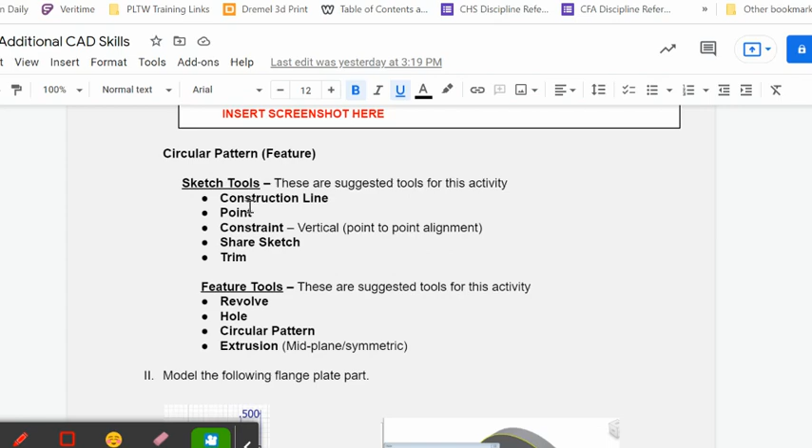Hello everyone, I'm going to show you all how to use the circular pattern in Fusion 360 and make this part. As usual, we can see where our sketch tools that you're going to need to use are: points, construction lines, constraints. We might need to do some trimming. Then there's our feature tools as well.

First thing we're going to do is model the following part. It's over here. Ultimately, this is what you're making. This is much like the rubber handle that you just did. So let's get started. A couple things to note. I'm going to do this construction line across the origin. It might make our life a little bit easier.

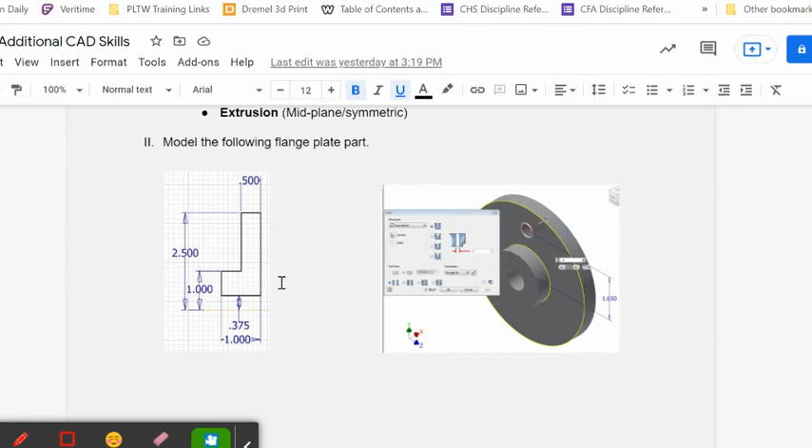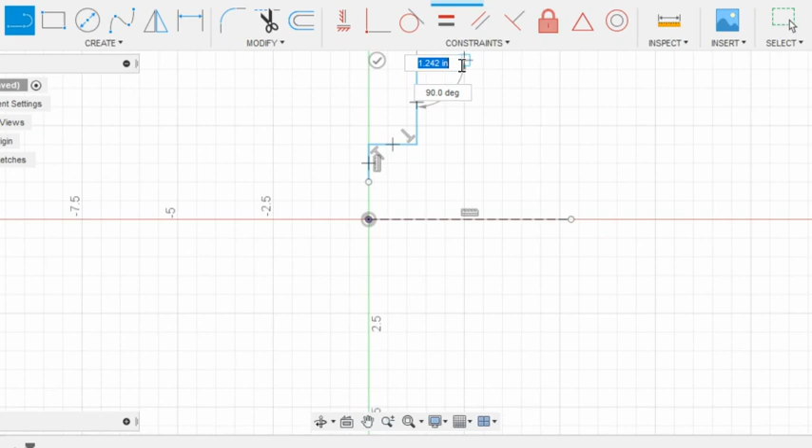So as before, I am actually going to start with my construction line on the origin. But I'm just going to put it over here. And then I'm going to create the rest of this part in just a rough drawing size. I forgot to turn the construction line off. Okay. So we're going to just model the rest of this part. There. So we don't have any accurate dimensions yet, but that's what we're going to fix.

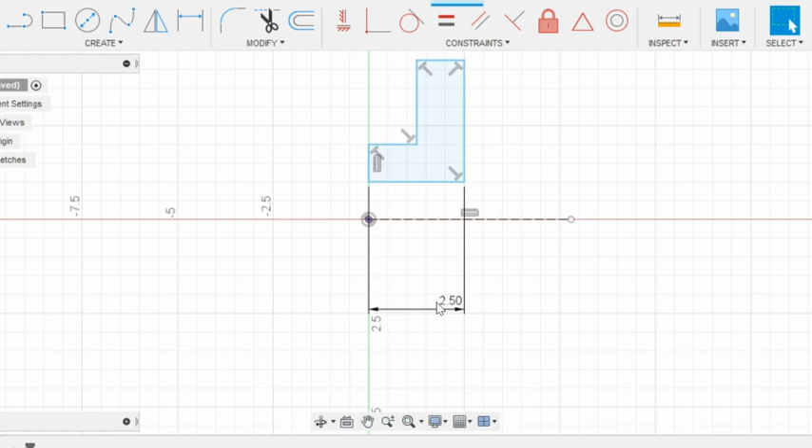So we can see, if I zoom in, it's 1 inch wide, 2.5 inches from bottom to top here. So let's start with those. So we know that from here to here is 1 inch. Ooh, looks like I made mine a little big. Let's change that dimension. Let's fix some things here. I should have done that in the first place.

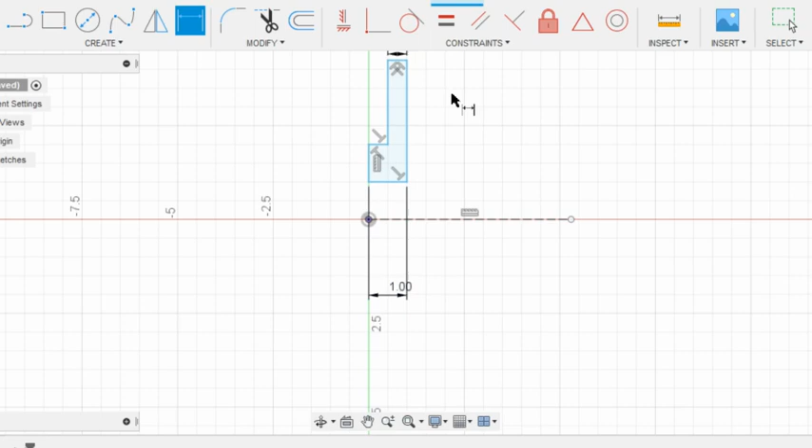So I know that this, let's start with this one. We know that this is 0.5 inches. And we know from here to here is 1 inch. So that fixed that for us. I know that from the construction line to the top of this is 1 inch, and from the construction line to the top of here is 2.5. So I know from here to here is 1 inch. I know from here to here is actually 0.375. I'm going to go ahead and fix that.

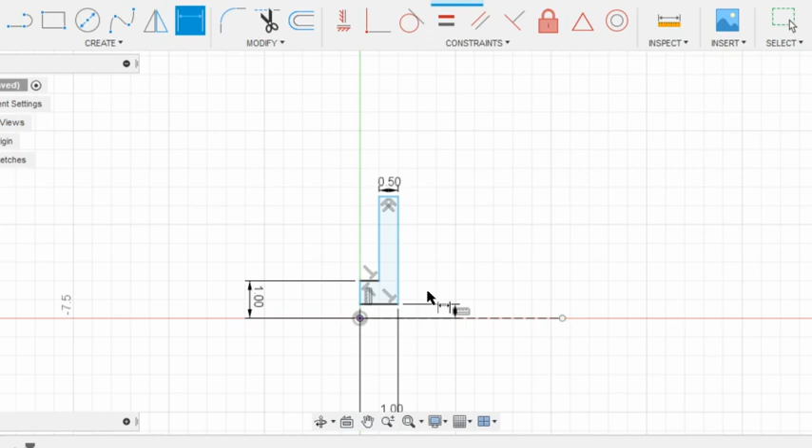And from here to here is 2.5. Okay, so I made my initial drawing a little larger than it should have been, but we use the dimensions to fix it. 0.375, so let's check 0.375 from there to there. All right, looks like we're good.

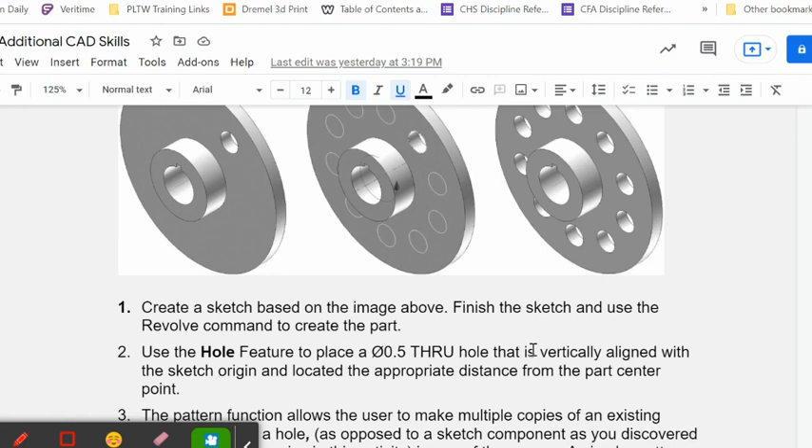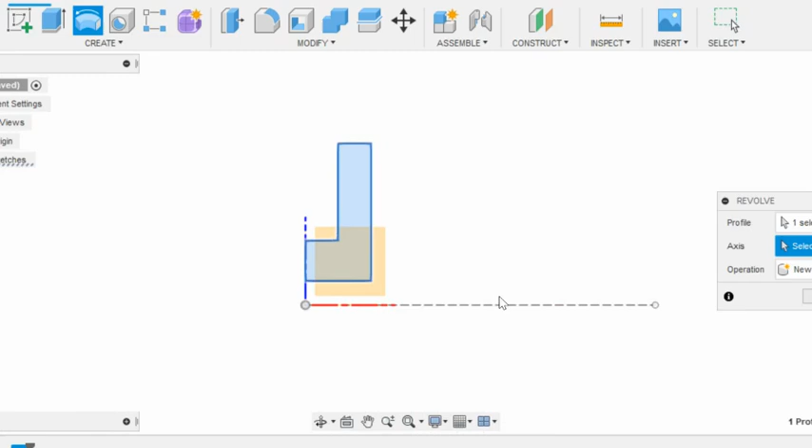We're going to revolve the sketch to create our part, and then we're going to use the hole feature to place a 0.5 inch through hole vertically aligned with the sketch origin. So first thing we want to do is, we don't want to create a sketch. That was my fault. We're going to revolve this part along this axis. Now we're going to say okay.

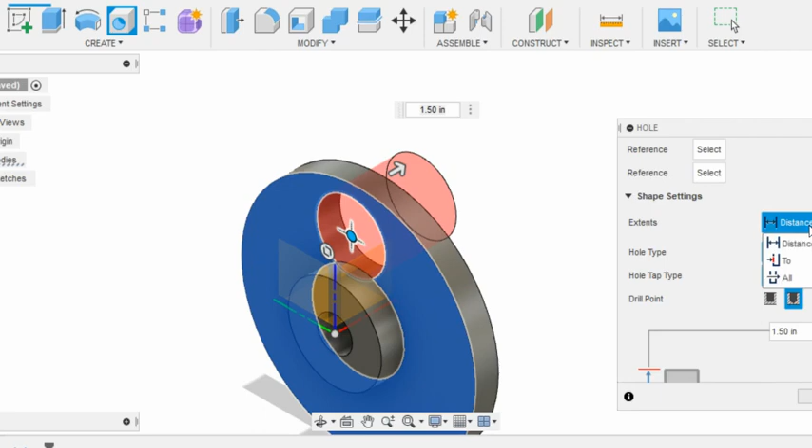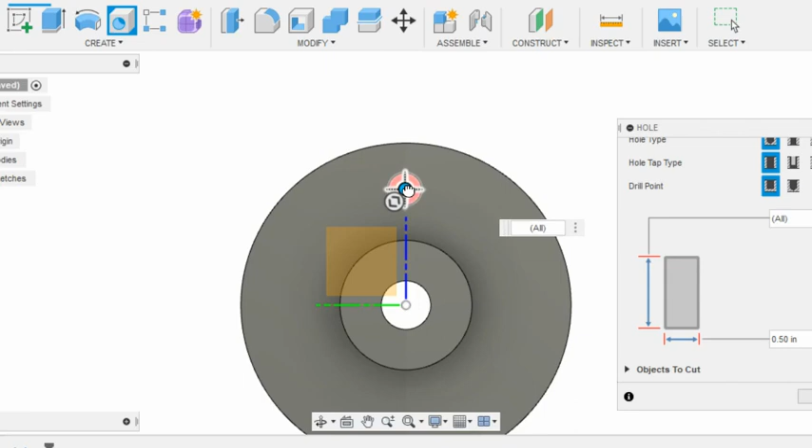We want to use the hole feature, and it says the face is here. We want it to be a through hole, so all. We want this to be just a basic through hole, 0.5 inches. Okay. We want it to be vertical construction. Now we have that, okay?

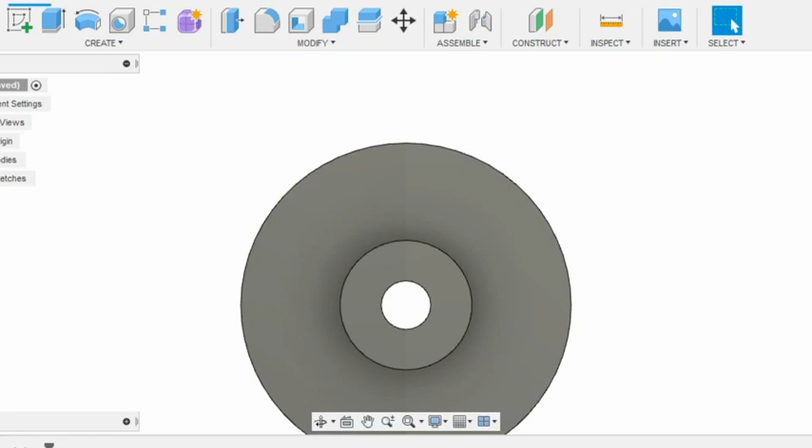But how do we truly edit things to be the way that we want them? Because we don't know if that's correct. Is it perfectly vertical? Who knows? So let me show you all a trick. I'm actually going to delete this. We're going to create a sketch on this plane. I am going to use the point command to create a sketch point. So this is something new. And all it does is just place a little spot that says here.

We're going to use our geometric constraints to make sure this is vertical with the origin. We can see our constraint has been applied. The next thing is I want to make sure this hole is centered from here to here. So let's see if we can figure out how far that needs to be. So if this is, well, a tool that we can actually use, I'm going to show you a secret. We use our measure tool. From here to here, we can see the distance is 1.5 inches.

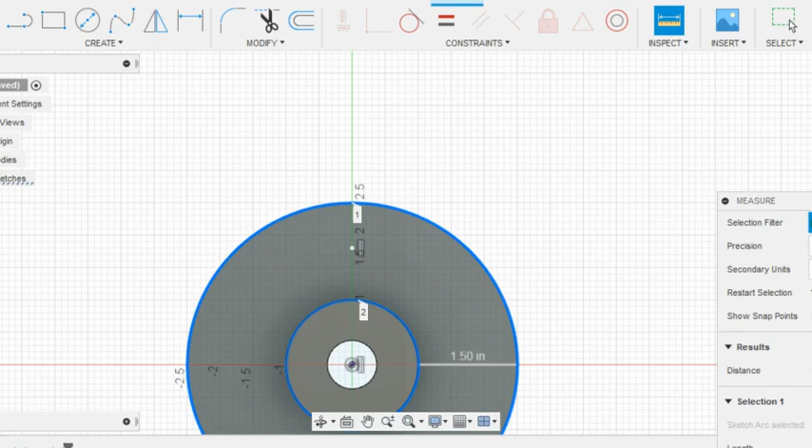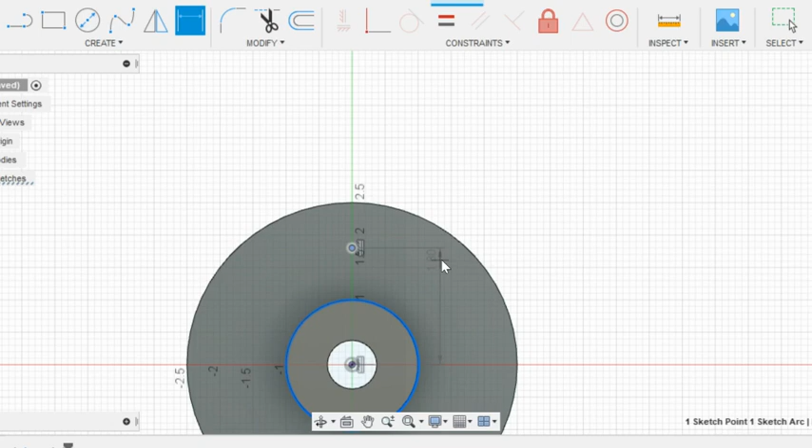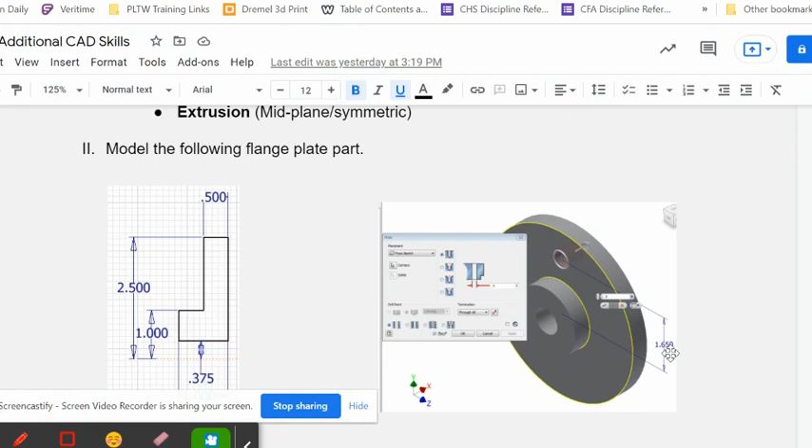So if I use a dimension, I can go from here to here, needs to be, sorry, that did not work right for me. I'm going to hit escape. And let me pause for just a second to take a look here. Okay, I'm sorry, I forgot that it showed us right here. 1.650 is the dimension here. So we're going to use this dimension tool. And between these two, that should be 1.650. All right, now we're going to finish the sketch.

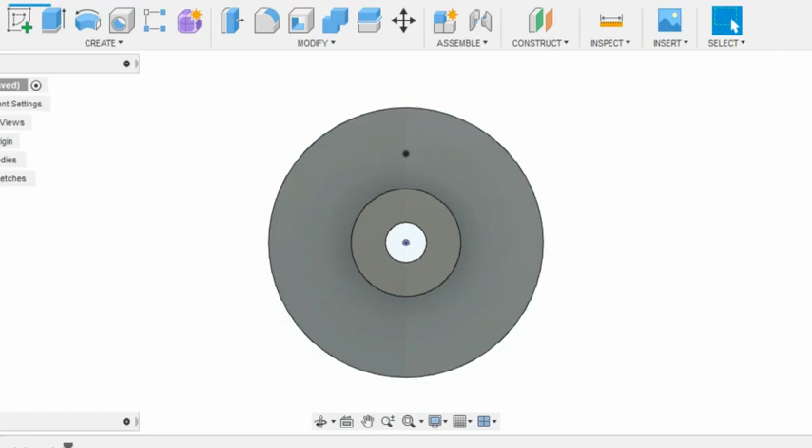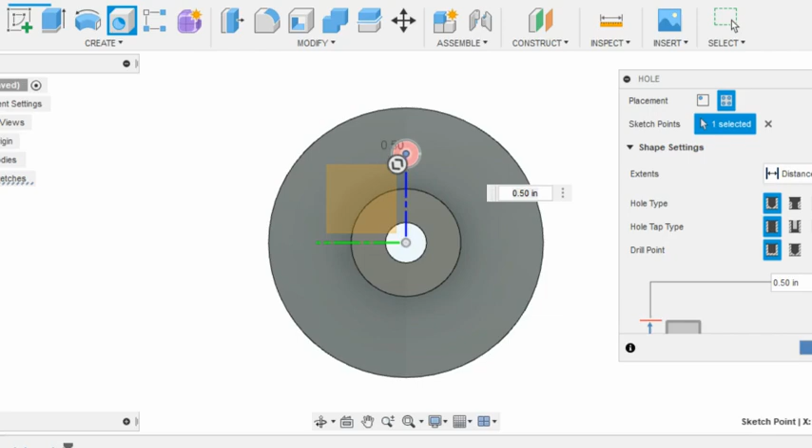So what's important is that we have this point here. And now when I do it on that point, here is how I'm going to do it. I'm going to select the hole tab. On placement, I'm going to say from sketch because there's a point on the sketch that I want to choose. Now that this says sketch points, we select the sketch point to locate the hole. Now that we have all of our hole settings from before, I'm going to hit OK. And our hole is exactly where it needs to be. So let's finish this up.

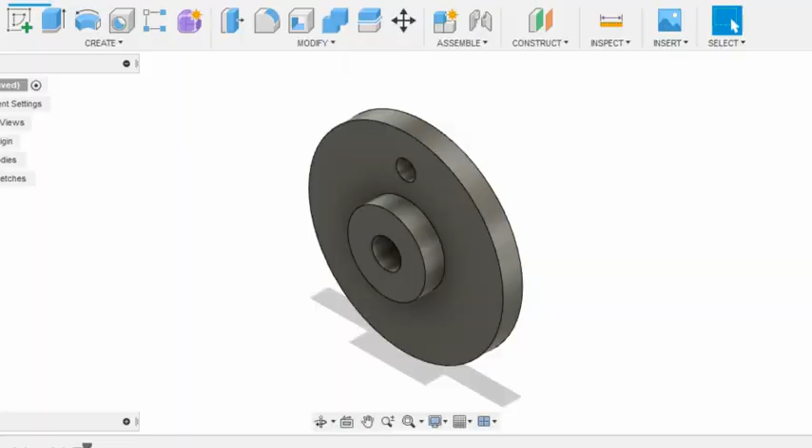The pattern function is going to let us make copies of an existing feature. You can read about the 3 ways. What we're going to use is circular pattern to have 10 holes around the center line. So in the create, we're going to use our drop down. We are going to find pattern, circular pattern. Type on the faces. The object, we're going to select the feature that we want to pattern. The axis is now where we're going to rotate it around. So choose the point. And I chose the wrong one there, but I'll just reselect.

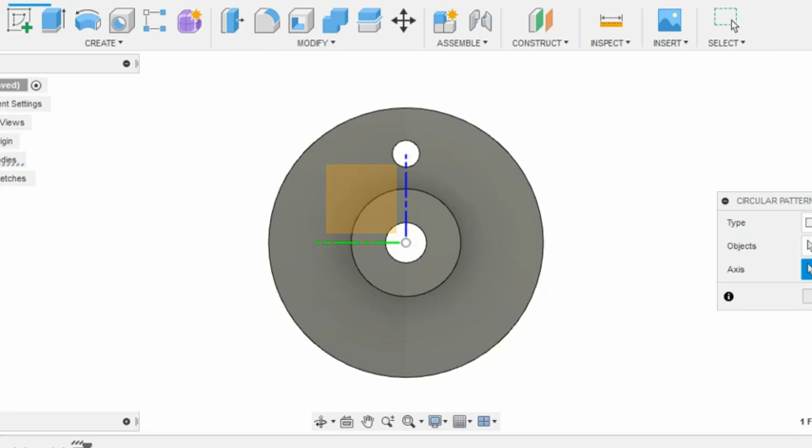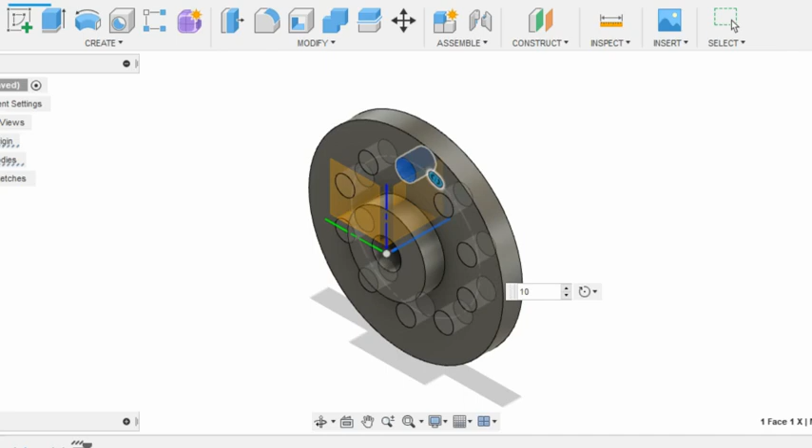Sorry. We're looking at the axis that it is going to rotate around in the direction. We want it to rotate here through that center line of the hole. Quantity, we tell it how many we want to pattern. And then hit OK. And there is our circular pattern hole. So you can take a screenshot of that and turn it into the assignment.